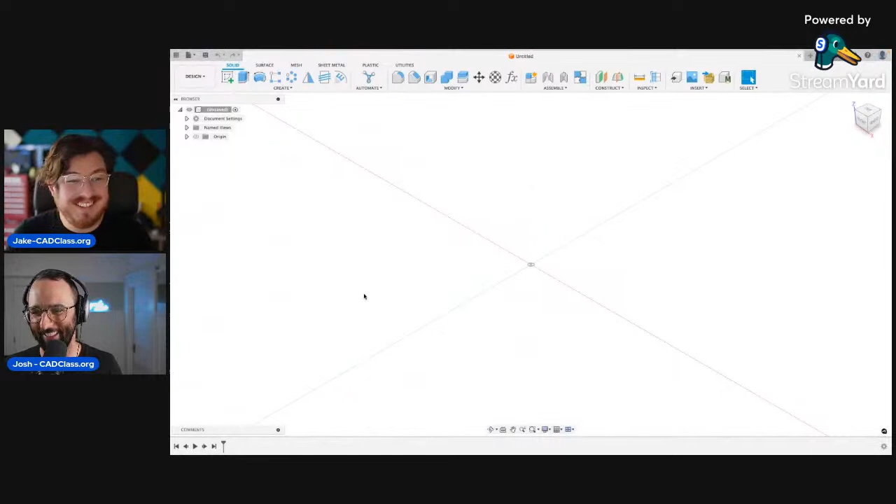Let me go ahead and present my whole screen. So I'm not going to see Josh's beautiful face. Yeah, but they still see it, so you're not going to see it. Too bad for you. Let me open up not the Lego brick, but the plastic building brick, for legal purposes. I love saying that.

That's going to be in our mechanical design section. So let's open up our Lego brick and see what David's referring to. The little rectangles did not stick to the side walls.

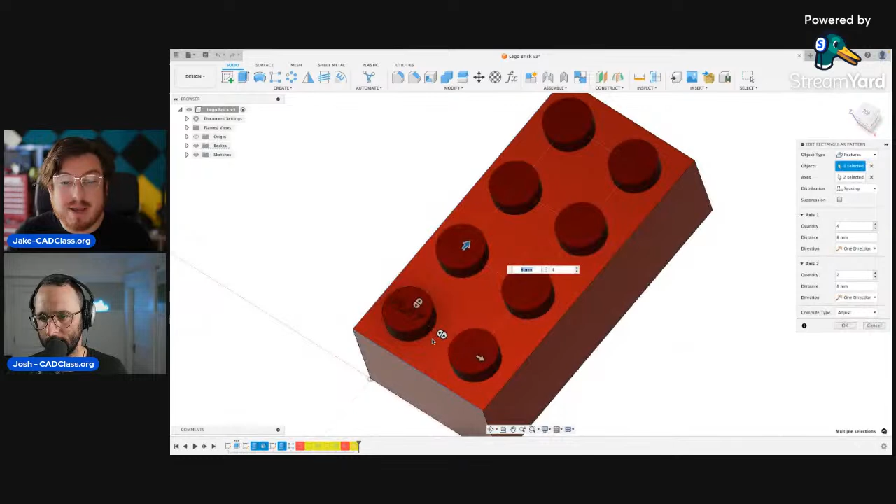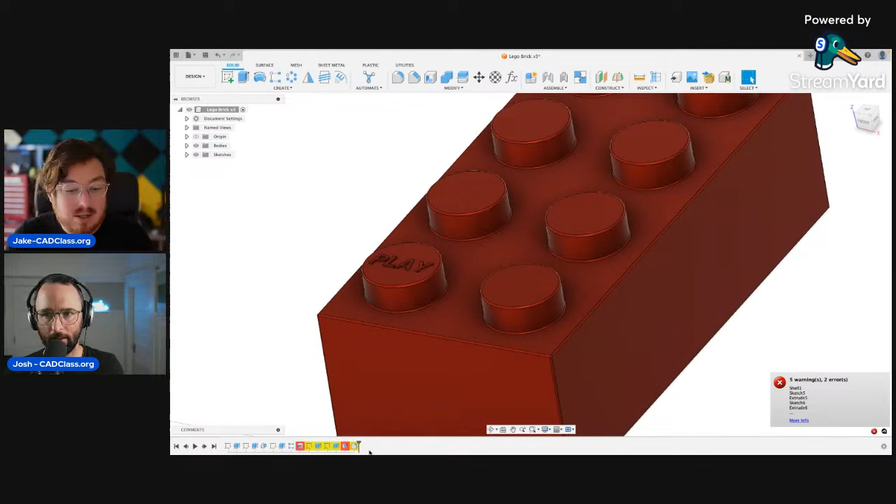Okay, I think I know what you're talking about. So if you guys can see right here in my timeline, I've got a ton of errors, and that's because on this project I selected to pattern both the tapered cylinder and the text. I'm just going to unselect that extrusion, and redo it. I'd like to pattern the cylinder and the taper, but not the text - I don't care too much about that. Let me go through why it's giving me all these errors.

It looks like it's slowing down a little bit - yeah, Fusion really doesn't like the shell operation very often. It's a massive pain. We've had to tell people many times now, especially in the Discord, that for some reason the letters really mess with this shell function, as do other things. They're on the underside - yeah, I see that, David. We'll go to the underside here in a sec, so it's definitely something you do later down the line.

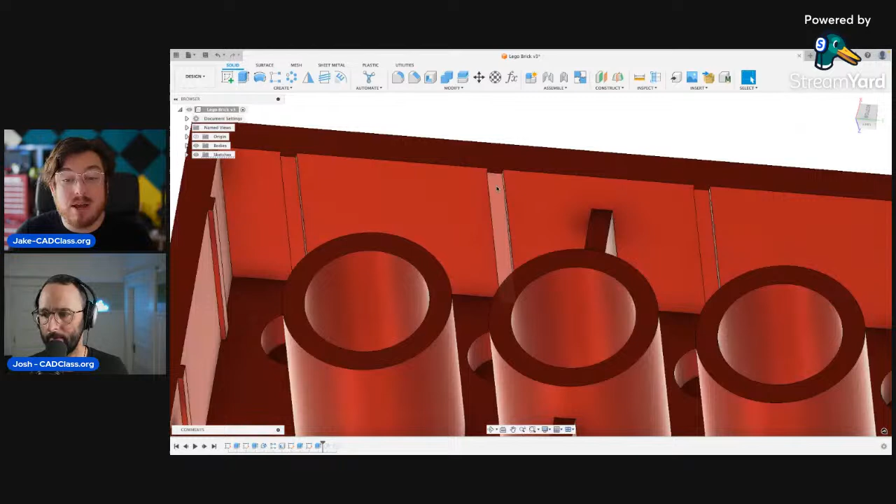And there you go, things are corrected a little bit more. So on this page, is he saying just the extruded rectangles right here? Yeah, let's see - 'the little rectangles did not stick to the sidewalls.' Let me put his comment up here. So by the little rectangles on the sidewalls, I presume you mean those - right there, yeah. Okay, so they're moving back and forth a little bit. There's a couple different ways you can correct this.

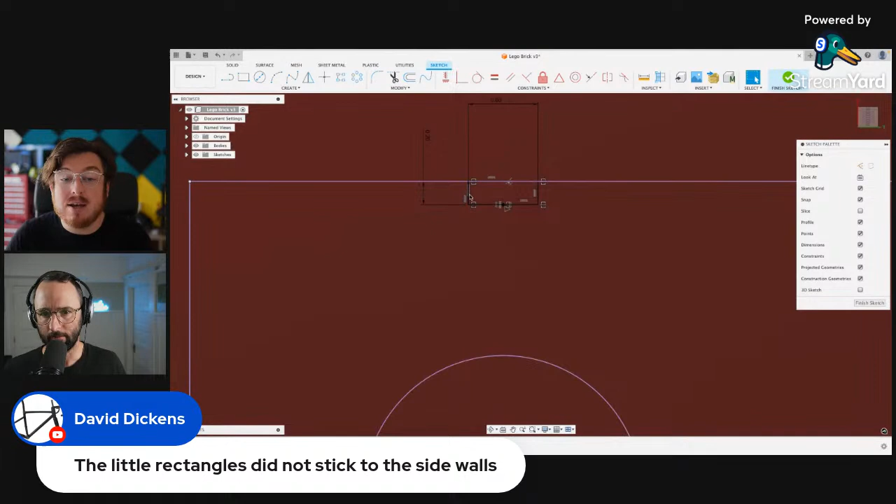One way would be to use the collinear tool and select the two edges that should be meeting. If you guys can see this, it makes all of the lines black and fully defined - that's what we're looking for. All of these should be completely defined and locked down in place. If they're not, you need to do a little work on this. It looks like this one is movable again, so I can just add on some collinear constraints.

The other way to do it is as you pull up R for the rectangle tool, instead of clicking in empty space to make a rectangle, you can click on the projected edge first - you can see I have this little X there, which lets you know it's going to be applied with a coincident relationship. So when I drag, it's not even going to move away. I can still adjust the dimensions and where it is on the page, but this top edge will always be attached to it. So I'd probably either add that collinear constraint or maybe redo the rectangles a little bit.

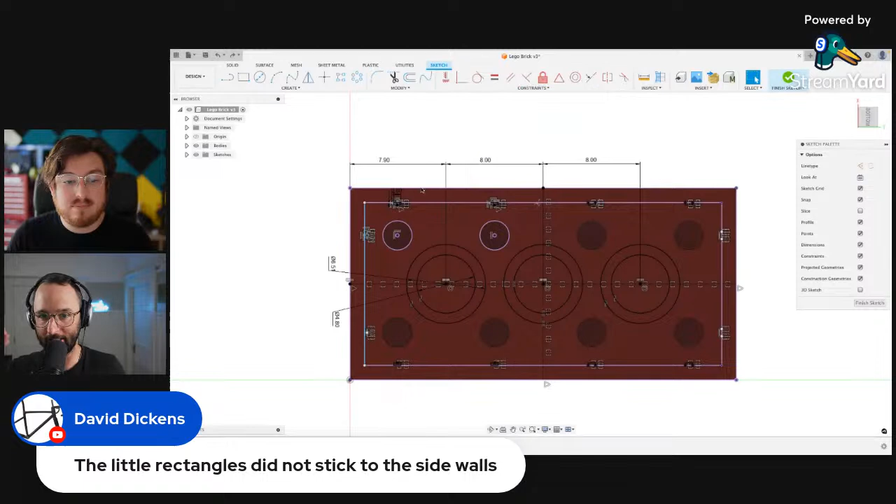He asks, can you show us what tool that was? David, that was the collinear tool - the collinear constraint. In the constraints toolbar at the top, you can click the dropdown and hover down to collinear. When you click the collinear tool, you select two lines, and that puts those lines on the same line.

So I'll do it again. As the name implies, collinear just means two lines that share the exact same axis. So if you had one line here and one line right above it, they would not be collinear because if you extend them, they don't run into each other. So even though they're parallel, they may not be collinear.

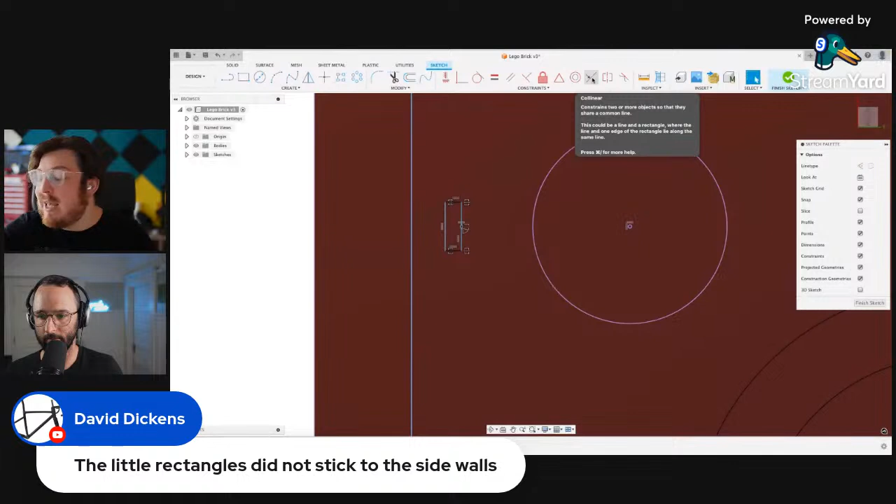It's in the exact same area as coplanar. If I put a cup onto a coaster, the top of there and the bottom of there are coplanar. So very similar things, they exist on the same area.

David says, perfect, thanks. But we have another comment from Tim that says he didn't select join.

Didn't select join, so that is automatically selected. Join is the top feature. So if I just go to join, extrusion, are you talking join or joint? Join. Yeah, okay. Oh, right here.

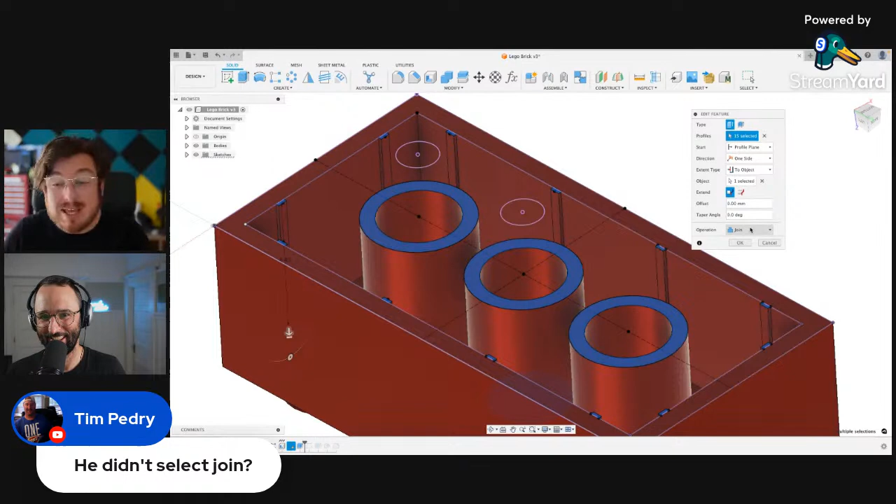So when you extrude things, it needs to have an operation. So it's going to say immediately join. If it sees that your extrusion is actually passing through something else, then it's going to be automatically set to cut. I'll do a really quick example.

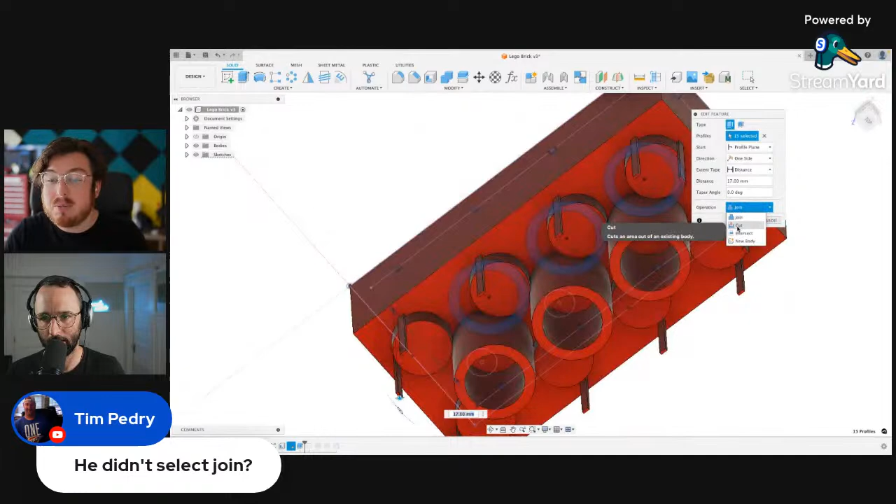Instead of selecting this bottom surface, I'm actually just going to be using the arrow tool for this, and I'll push this through the underside. You'll see it's automatically set to join, so I can change this to cut, and now it's red. It's actually going to be cutting out that shape through the body, which looks kind of wild.

We got an awesome Ethan, very smart. All right, so welcome back, by the way.

Wait, on the last episode, didn't you say we should never put two lines on top of each other? Jake, what do you think? This came up on the Pooch show.

So this is not two lines that exist on the same area. This is an edge of a rectangle that is collinear with another edge, which is completely okay because I'm not going to be moving them side to side. I'm going to be moving the rectangle.

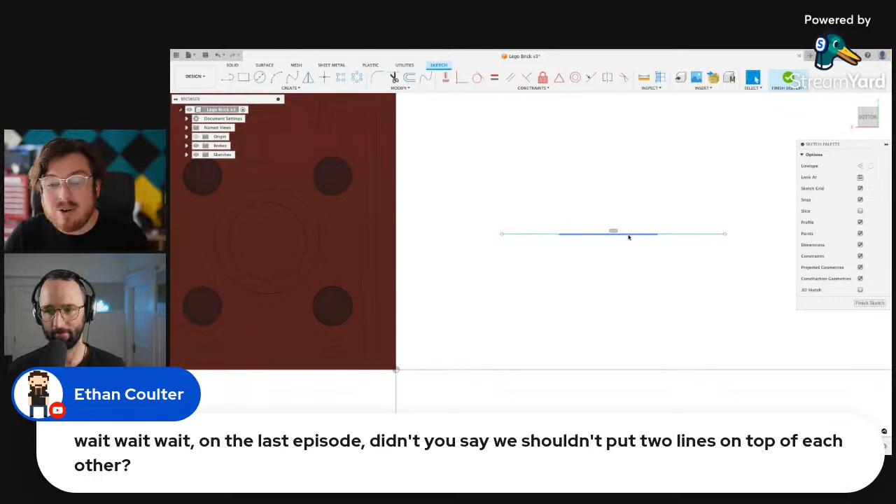So what was it, Ethan? What Ethan was talking about, what Mr. Alan Pooch was talking about last week, is that he had one line and then he also had another line. As you can see, it's really hard to click on just one line. I'm moving my mouse minutely, and it can't decide one line or the other. This is where we actually don't want to be messing around.

In our scenario, we have a larger rectangle and another rectangle right here, where I can define the length and the width of this, and then I can decide exactly where it is side to side. But the very top edge of this rectangle and the top edge of this rectangle already share the exact same collinearity, so I don't need to worry about that whatsoever.

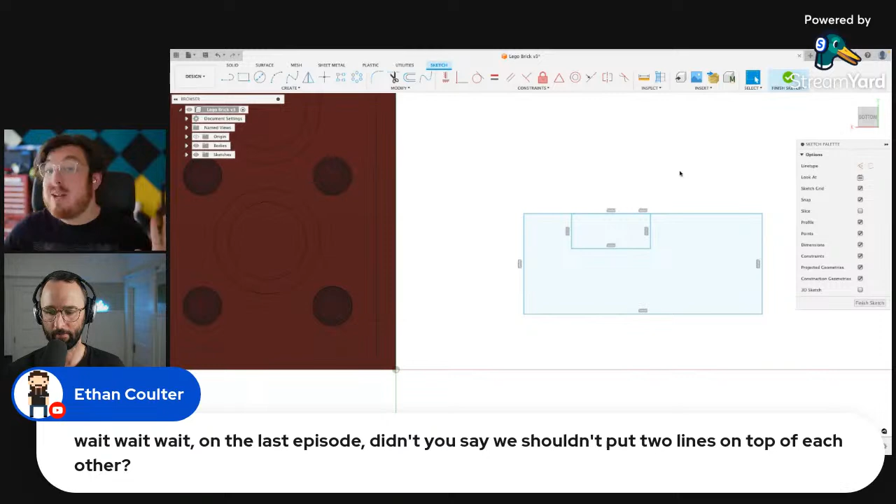So I think Tim's question isn't fully answered. He says join during extrusion. I'm guessing Tim means join during extrusion.

So when you're sketching in 2 dimensions, you are constraining sketches. We're not actually dealing with the join tool at all. Join actually refers to what happens when 3D bodies either intersect or cut, so it has only to do with the 3D portion of this.

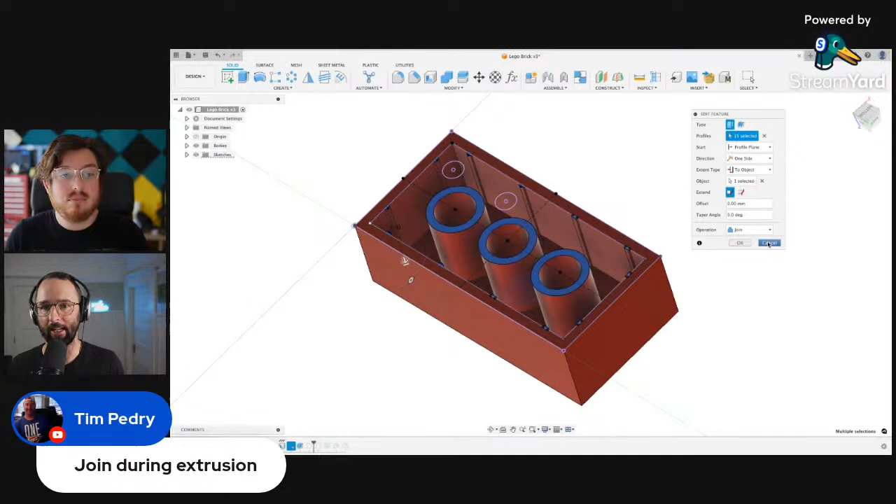So the question Tim had was, in the 2D sketch, when I can move my rectangles around, they're not actually connected to the edge of the Lego brick. So how do I stop that from happening? Because you're in the 2-dimensional workspace, you're talking about constraints, not the 3-dimensional.

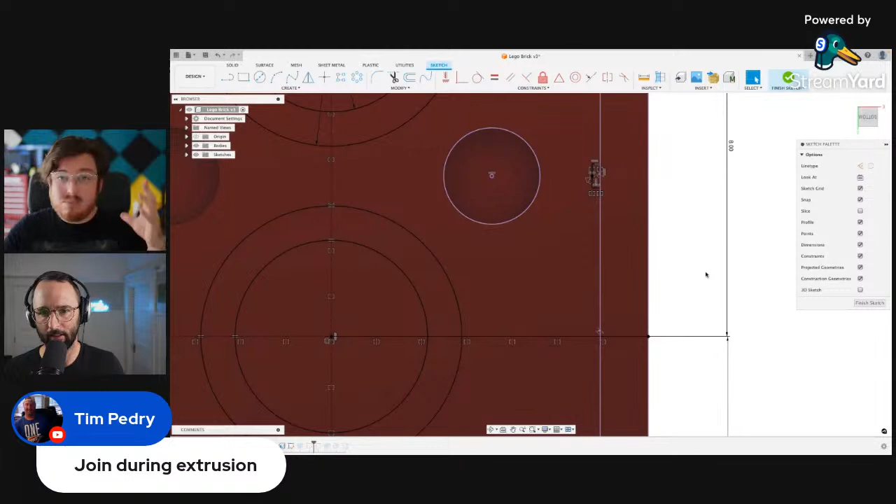You can definitely think of constraints as joints, but it's a little bit more advanced than that. Usually, when you talk about joints, you're talking about things physically touching each other. But a more advanced idea in joints is that you can have an offset joint where you have 2 things that are offset, so when you move one, the other is pulled with it because there is an imaginary joint between the two things. In the same way, you can have a defined distance, a dimension, between 2 objects in the sketch universe. Yep, so kind of similar.

I'm liking where your brain is going, but try not to think too deeply about it because it just gets too confusing at this early stage.

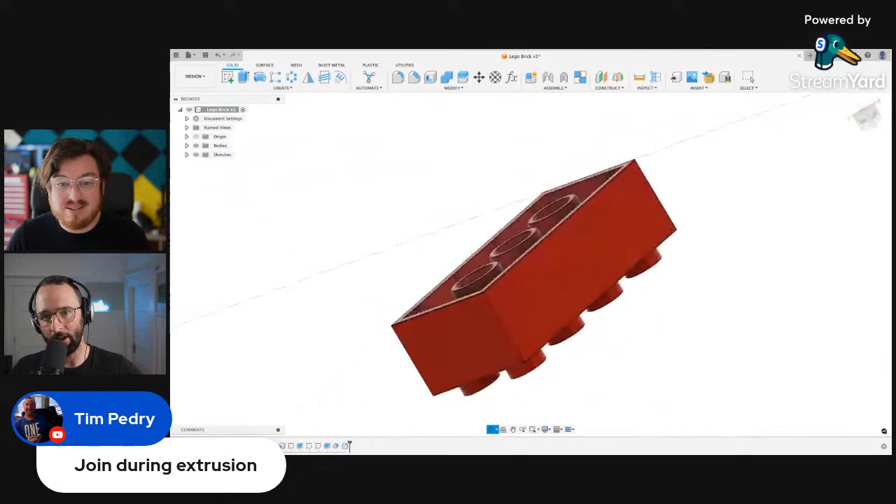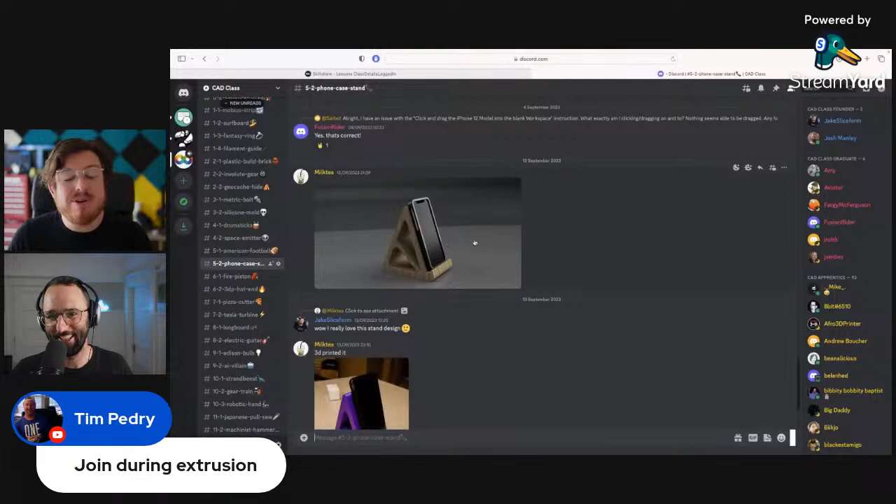And Jake, we've got some projects to show. Yes we do. Somebody made the phone case and the phone stand from chapter 5, and this is already really rad. The idea with the phone stand and phone case project is that, as Josh and I are educators, very often the purpose of the project isn't to make a phone case or phone stand, because how often is that going to be useful? It's the little things inside it that are kind of more interesting.

So in this project, we talk about either importing a Fusion 360 file into Fusion, so if you go onto a place like GrabCAD and someone has a Fusion 360 file, we show you how to import it.

That's rad. We also encourage you guys to grab your smartphone and measure it with a pair of calipers and recreate it, so you get a bit of reverse engineering, which is gigantic in the world of CAD. Then we make a case to introduce the idea of interference and how to adjust and edit that so you don't have two bodies clipping through each other.

And then finally we make a little phone case stand just to introduce texture map controls, because this is the appearance chapter. So if you have a wooden project, you can actually really accurately adjust the grain pattern of the wood to make it as accurate as possible.

A lot of our previous students who have a ton of woodworking experience will take what they learned from this course and make a woodworking project, make it in CAD, and sell it before they even make it. As soon as someone says, hey, that table looks rad, I want to buy it off you, then they can make it. So they don't need to buy all the lumber, make it, photograph it, store it, and then hope that maybe one day it'll sell.

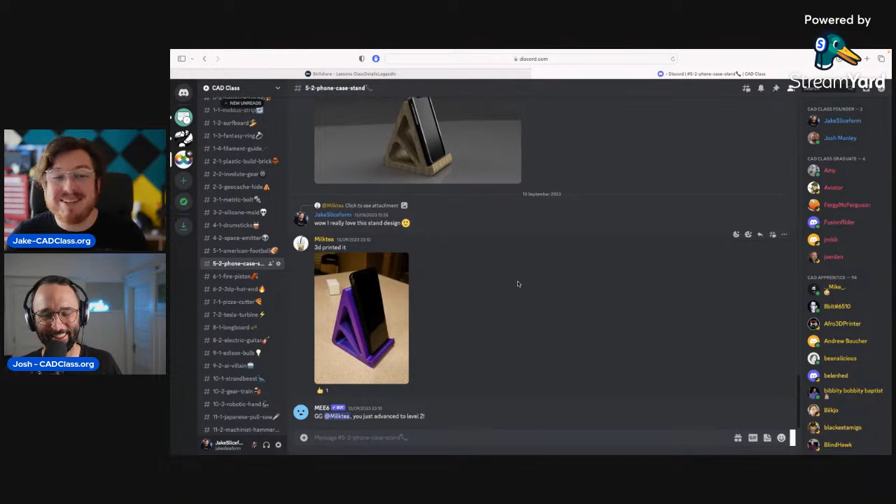Really rad. And then the other one was the fire piston as well, again from Milk Tea. Really dig it.

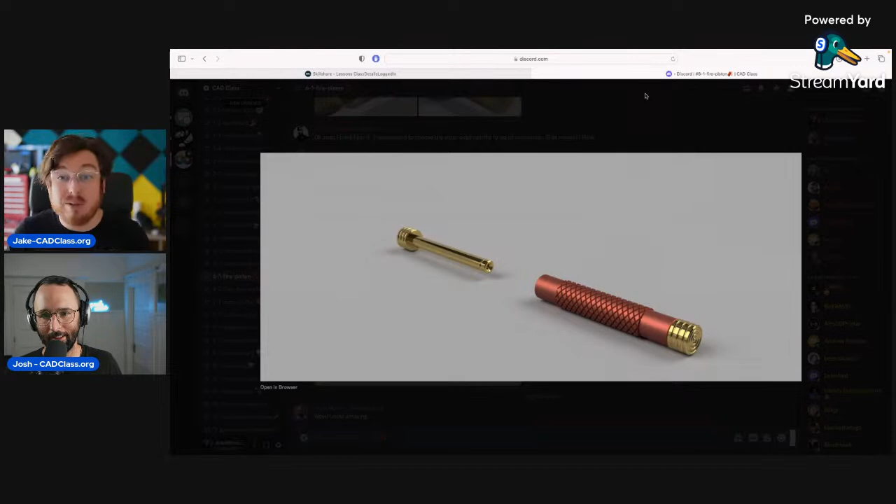You guys that are seeing this and thinking, wow, that looks really different to my workspace - this is the rendering workspace, which we cover in chapter 9 of the book, or week 9 in our course. This is where you can pull in your 3D prints, or all of your models, into a different workspace, add the design into the rendering workspace, add some lighting and shadows, mess around with the camera a bit, and make something that looks more photorealistic. If you put some time and effort into this, you can fool people into thinking this is a real product.

But this looks really fantastic, I love the way that turned out. And then there was a Mr. Mitnick had one, which I'm not sure if I saw that. Let's see - we have a bunch of people that have stuff in the challenges as well.

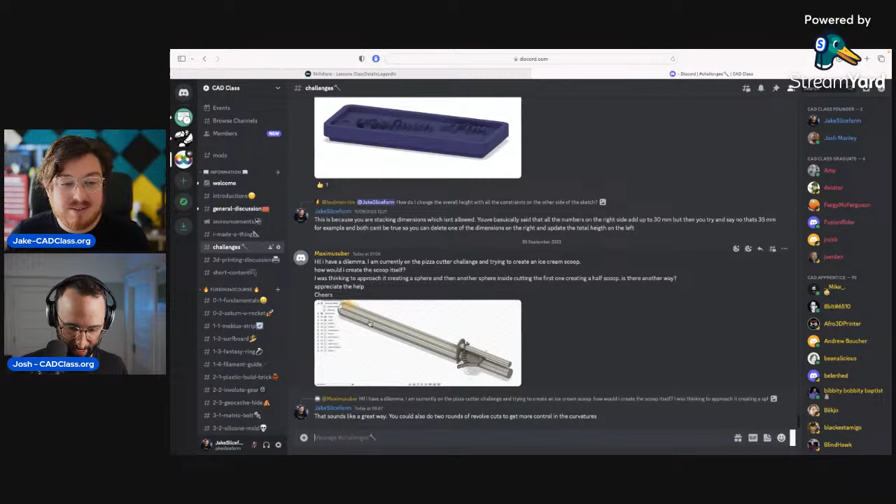Oh yeah, that's right. I believe that was it. Somebody's working on an ice cream scoop, which I'm so excited about. Awesome, that's gonna be rad.

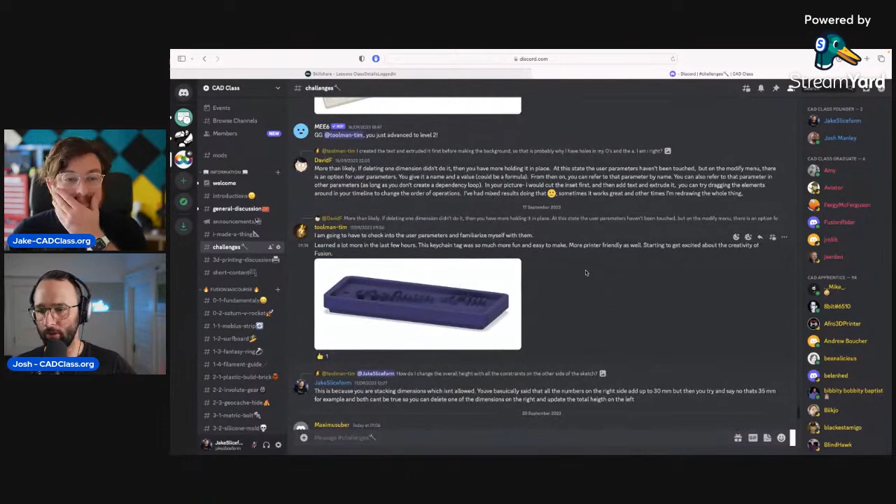This is how you get better at CAD, right? All of you in here doing these challenge exercises, forcing your brain into the mode of 'I need to be able to make this thing,' going from us holding your hand to you actually designing this in the real world - this is actually how you learn. So I love seeing this stuff.

That's what IKEA does with their kitchens. That is what IKEA does with most of their online catalog.

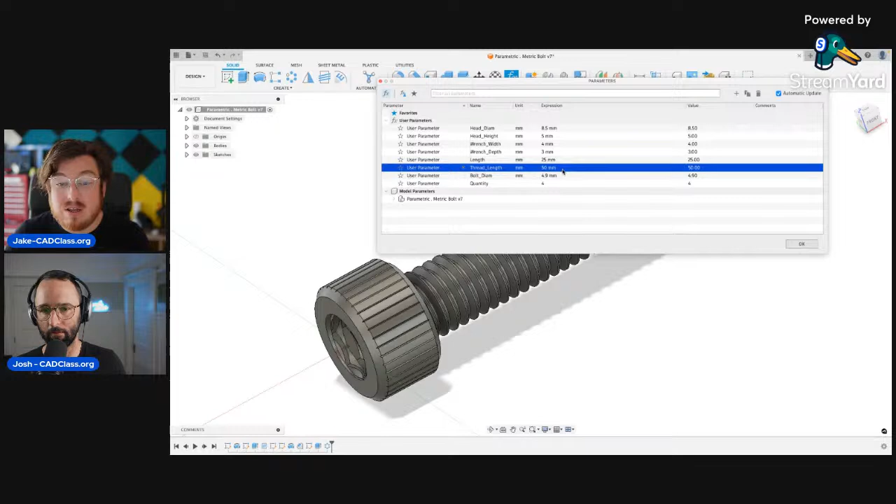Then I can click OK - oh whoops, that should auto update. What's going on? Oh, the length - there we go. I want to change this to an M5 by 50, then it automatically updates very, very easily. And then you can say, well, I actually only want the threads to be on 25 millimeters - there we go, then it auto updates. So that's the value I was changing around.

So you can really quickly edit parts of any model incredibly quickly, you can customize them very easily. Let's go ahead and change this one back to 25. Very, very cool project, I use parametric design all the time - if I'm working on a 3D printed part and I want to maybe adjust the size but keep the wall thickness exactly the same, I can mess around with it in a bunch of different ways.

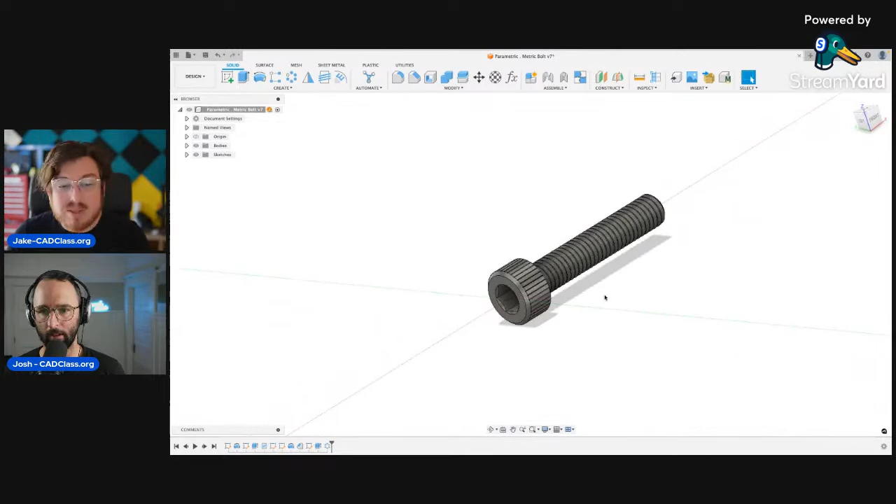But one of the things somebody was having trouble with is the triangular profiles that give us these really nice cutouts here on the bolt entrance and on the very end of the bolt right here. So they were having a little bit of trouble finding where the triangles are that are being revolve cut, and so this is where we can kind of sort it out.

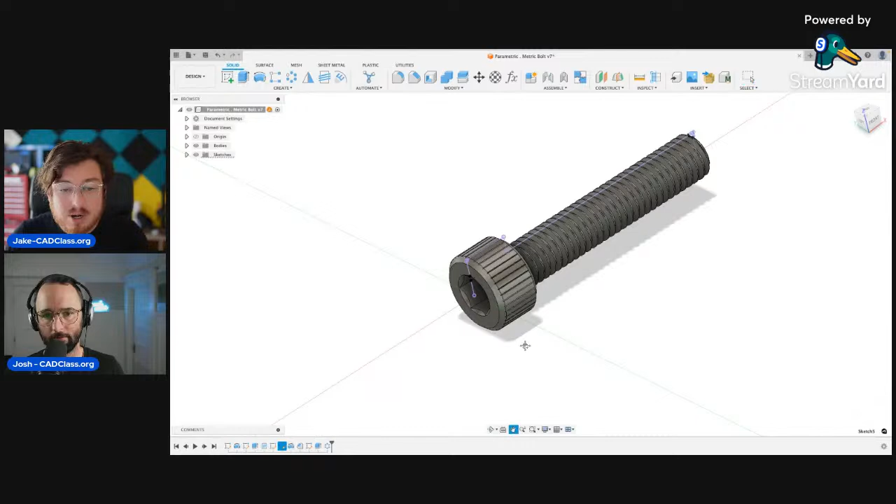One of the ways I like to figure out exactly where my sketch is in the timeline - you can absolutely go through and name all of them, or you can click through the sketches here and actually find out exactly which one it is. So there's a bunch of different ways to find out what you're looking for. But on here we have our revolve cut, as you can see that's cutting out the very end of our bolt and the entrance of our bolt. So where is this sketch? Let's slice it.

Where is this sketch? There we go. So just going to slice that and cover it. So we have got this triangular profile right here, and we have got this triangular profile right there.

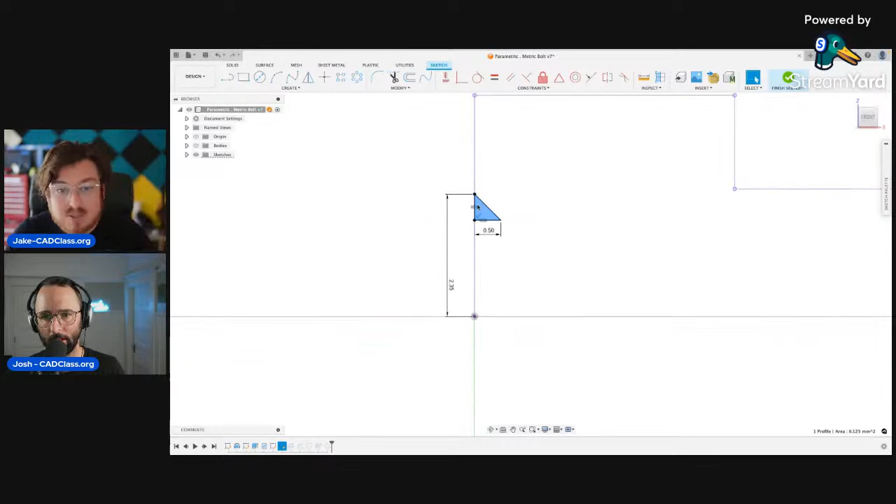Let me turn off the body really quick, because this is how we have it in the book, where we just have our dimensions. So if you look in our book, we actually have our origin right here, letting you know this is on the left-hand side. We've got a triangle facing upwards, because this is going to be cutting the entrance of where the Allen key would be going into. And for this scenario, we've got an equal-sided triangle.

So we actually only need to define one edge length of this triangle. And then we're saying that the left-hand side is coincident with our origin. And then we just need to say exactly how high is it up and down. Again, any one of these dimensions can be parametrically driven, so you can edit them as much as you would like. But this is going to be on the left-hand side.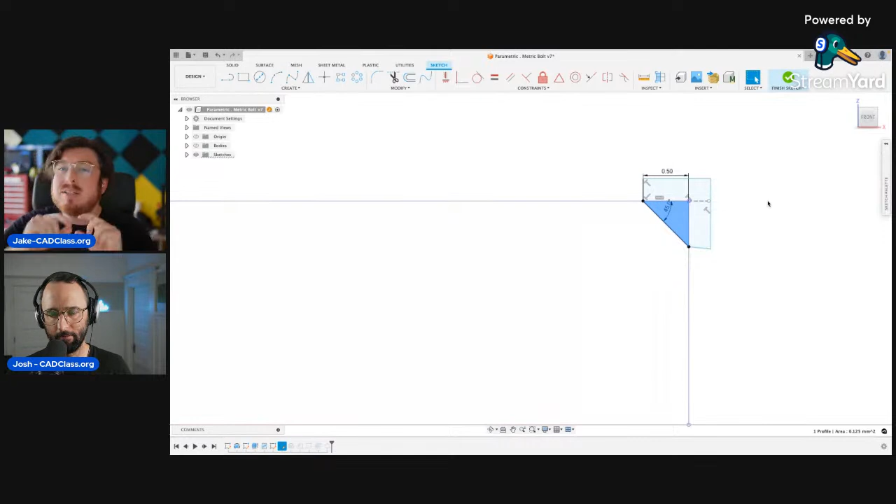This is this kind of funky, undefined section of the sketch, because if you just revolve this triangle alone, very often it doesn't cut all of the bolt. It leaves you with a little sliver of material, so you can actually extend the profile that's being cut. So if I go over to our revolution, you can see we've selected not only that triangular profile, but also this outer material, so then we can guarantee that we're cutting all of the material.

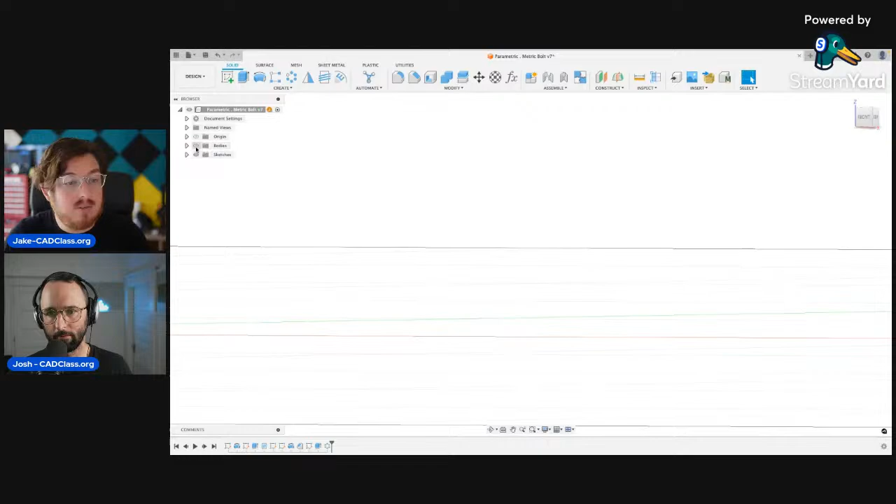And then after that, if I turn our body back on, you can see that we don't have any weird sliver of material hanging out over there. And we have this really nice, neat triangular cutout on our hexagonal opening.

Yeah, and I think that probably helps. We'll find out. We might also consider, each time we get these comments, we try to figure out how to go back into the book and make these changes. We might have to change out some of the entire book about every month. So we might have to just show like an overall view of this bolt, and then where exactly those triangles are. I'm not sure. We'll see. We'll dive back into the book and have a look. But I love this idea, though.

I think the other thing that kind of confuses people, just to interrupt you really quick, is we have two different things that we're revolving in the same sketch. So we've got, obviously, these two, you can select them both. That's fine. But then we also have this other profile over here, which for a beginner kind of seems like totally dissecting a sketch. Normally you would say, all right, I'm going to sketch this, then revolve cut it. Then I'm going to sketch this and then revolve cut it.

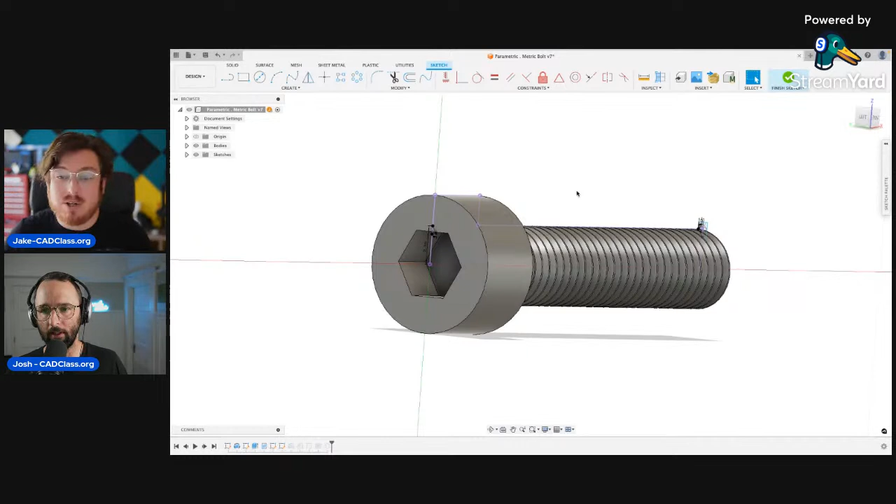But the nice thing about this is that they both share the exact same axis of revolution, which means they can both be cut in the same revolute cut feature. And because they can both exist on the same plane, they can actually be merged in it. So instead of having one sketch, one revolve cut, another sketch, and another revolve cut, we can actually half the amount of features and compress it so it's all in one thing.

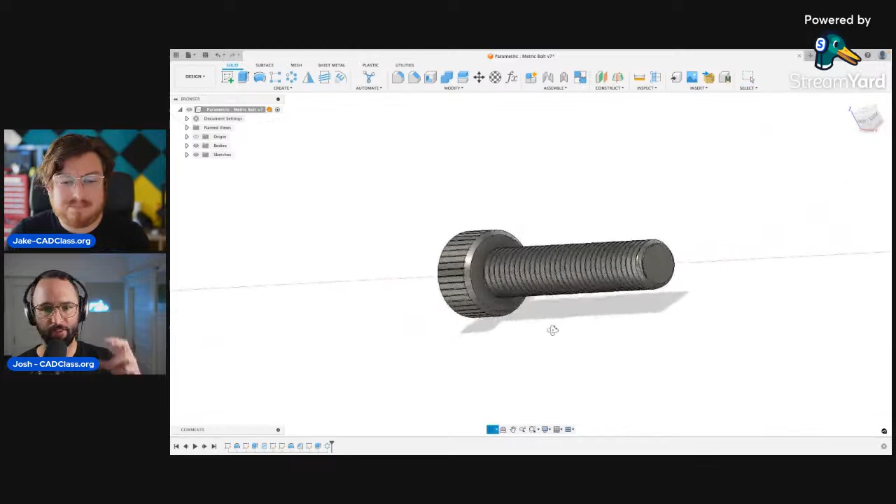So let's dive actually a little bit deeper on that topic. When you're thinking about keeping things clean, like when you're thinking about designing a project that's sort of scaling and getting bigger and bigger over time, the amount of features that you have matters. The amount of operations that you make matters. Can you talk a little bit about philosophically how you think about keeping things clean and doing it in fewer features, and why that even matters, what difference that makes?

So it's more of an organization thing for me, where if you have a timeline down here that's not very long, that's great. If you've got a timeline that isn't very efficient and it's super long and you have to scroll through it, it gets more confusing. Things get lost. You forget what changes need to be made. And it is just kind of bad form. It comes into the area of, I could be a better CAD person for me in the future, or I could be lazy for me right now.

So if you go through your sketches, you can right-click and rename them. Right at the beginning, I was hunting through all these sketches about where that profile was. If I wanted to be even more of a good engineer, I could rename this triangular revolute cut profile.

I want to double down on that. You're not naming things so you remember what they're called today, you're naming things so you remember what they're called next year, when you dive back into a project you haven't seen forever. It's the same with code. When you're coding something up, if you don't leave any comments and your code isn't very clean, you can't figure out what the heck you actually did. The same thing happens in CAD, where you need to know what the heck it was.

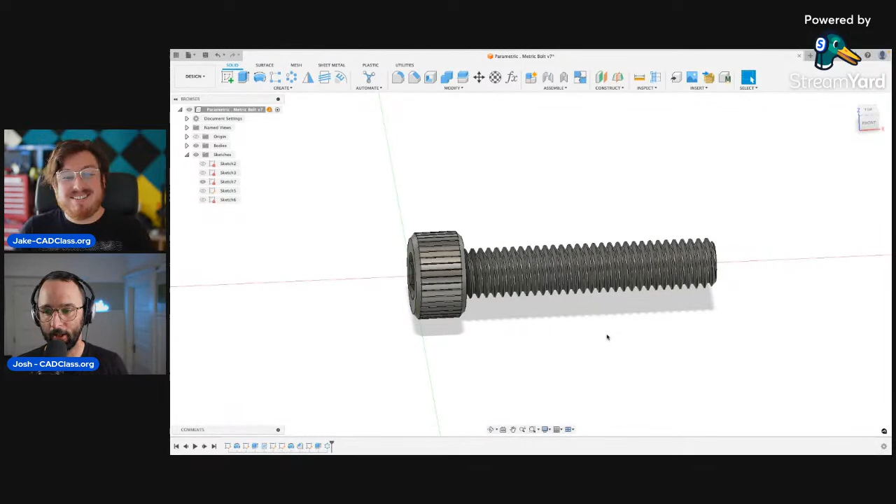You can kind of figure it out, but keeping things clean and tidy, reducing the number of features, and adding names to them allows you to go back into those designs much later. It also allows other people to go into those designs, understand your process and thinking, and make edits necessary.

In the world of CAD, a good example of organizing is when you're working in a team, maybe on a rocket or a robot with a small group of people, constantly changing and adding parts—it's kind of an alive project. But I'd say that's just as effective an example as working for yourself in the future, because another person is probably going to know just as much about this project as you will in a year or two, which is very little. So designing with that kind of fail-safe built in is absolutely critical.

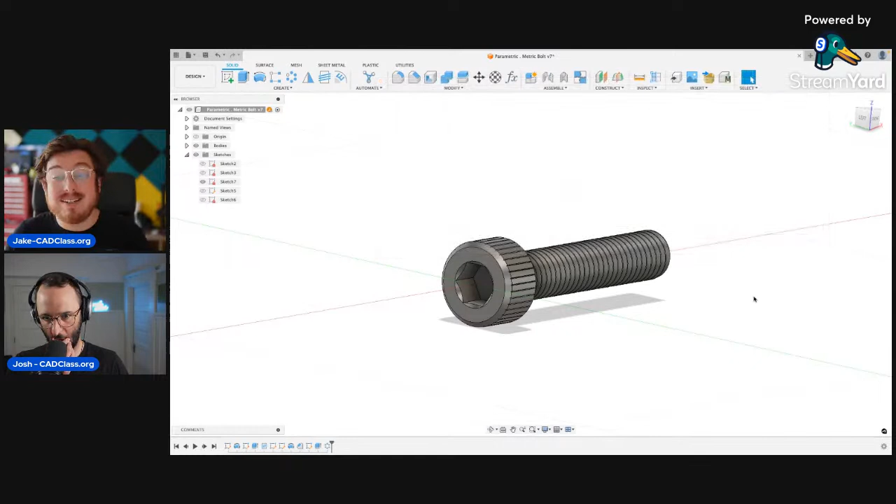Adding in names, adding in parameters so you know all the important dimensions are listed, having really good names, everything nice and neat and tidy, so you don't have a timeline you have to scroll through to find that one thing—that's absolutely critical.

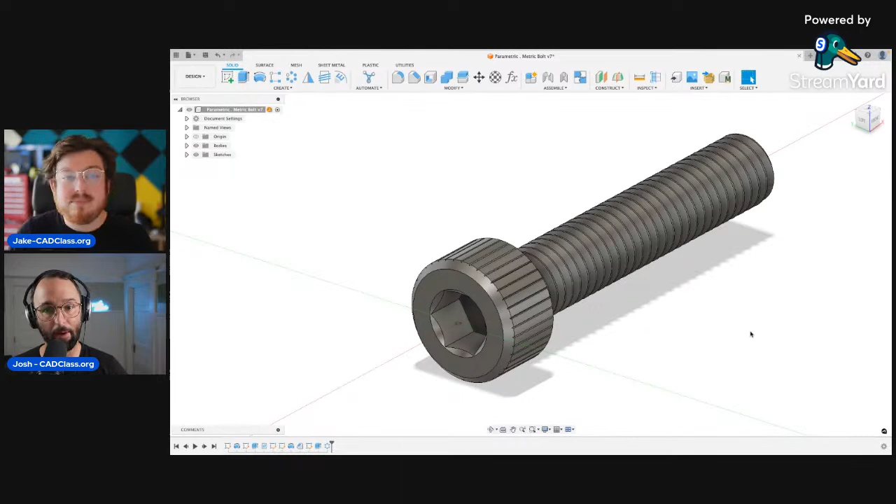For those of you who want to do this professionally, who are interested in turning this into a career, this stuff really matters. If you're talking to an interviewer and they ask for a CAD model you've built, and they see a timeline that's out of control and not very organized, they're going to get a sense of what kind of designer you might be, and they might judge you on that alone. It matters quite a bit for any students thinking about taking this into engineering fields, or even designing for clients.

It definitely matters. Absolutely.

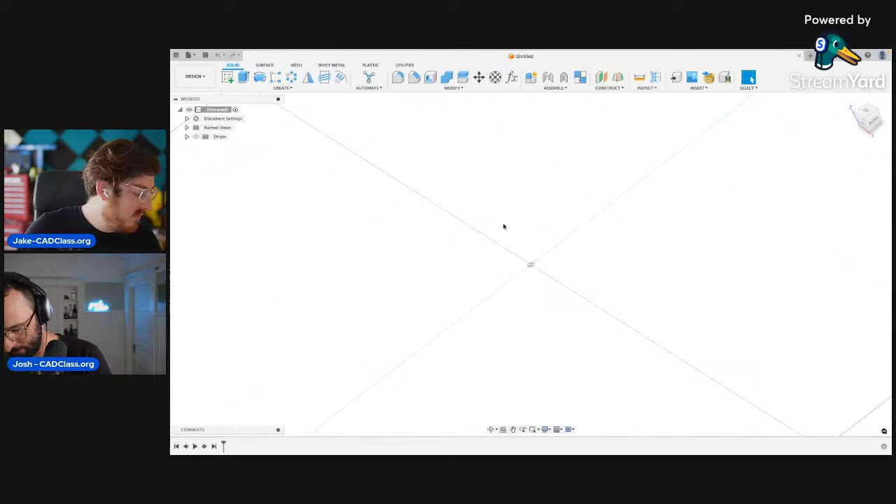All right, so our next one—this was page 66, is that correct? Oh yeah, for the filament guide. Third paragraph on page 66 was giving somebody some trouble. Let's see, 66, third paragraph, one, that filament guide—oh, that's the project tool.

Yeah, the project tool is hands down—we talk about it every week—the hardest tool to understand what it actually does. Just keep playing with it. But we'll talk briefly about this, try not to say the same thing every week.

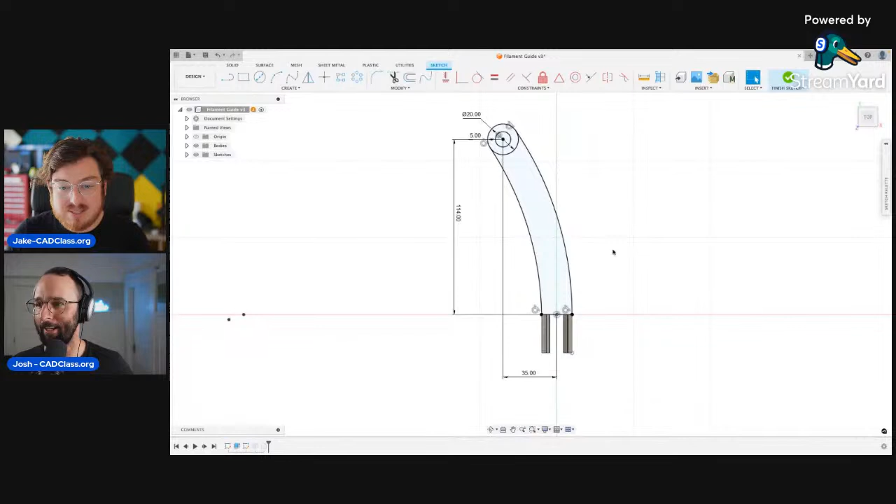Page 66, third paragraph says: press P for project and click the rightmost and leftmost vertical lines on the arms. Add a tangent constraint between the arc and this new line. Can you just do exactly what I'm saying? And let's see.

Okay, so I'm going to type P for project. You can see I've got my project tool right there. I'm going to click the rightmost and the leftmost vertical line and click OK. I have now projected this top edge, which is floating above my plane, onto my plane. So now I've got purple edges on the left and right.

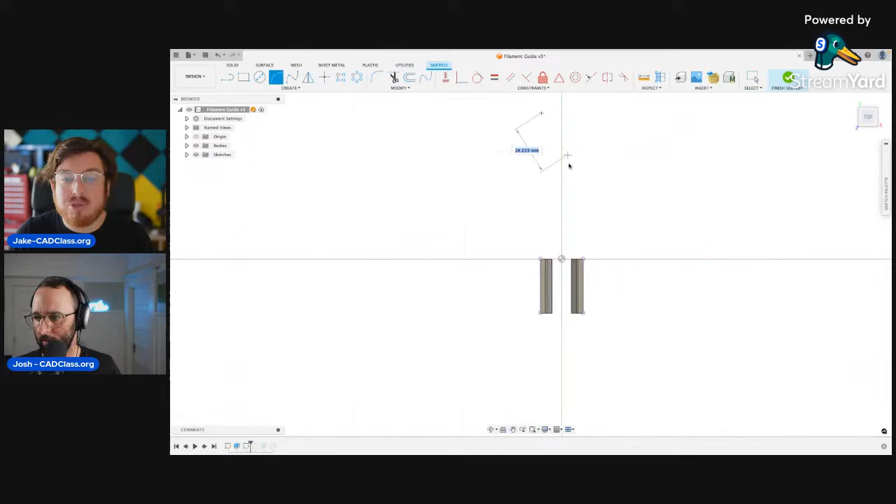Then if I add on a couple 3-point arcs that go to that line, I'll just do some random ones here and there. You can see this one automatically put on a tangent constraint just because I nailed it, because I'm a professional. But I can also go into the constraints, click on tangent, click on my arc, and then click on that projected line right there.

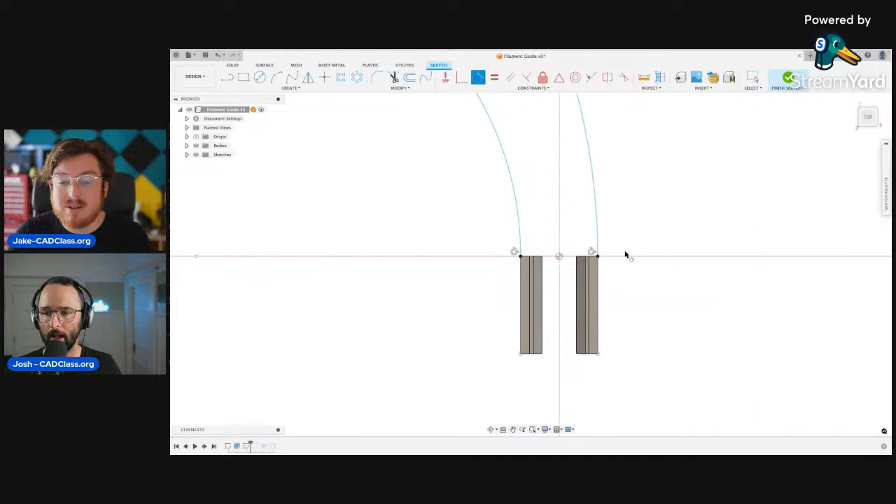I see. So I think what we'll do in the future for this project is show more of that projected surface. On page 66, you can barely actually see the lines you're supposed to project. So I actually think I do understand where that is tricky for people, okay.

This brings us to a topic I want to talk about as we're going through this, and that is we are thinking about getting rid of some projects and adding new projects for version 2 of our book, probably coming out middle of next year. So anybody in the chat who's got an idea for a project, a tool, or an area of Fusion that you'd really like to explore, please shout those out either in the Discord or live on this chat. We are actively working to build out a few new projects.

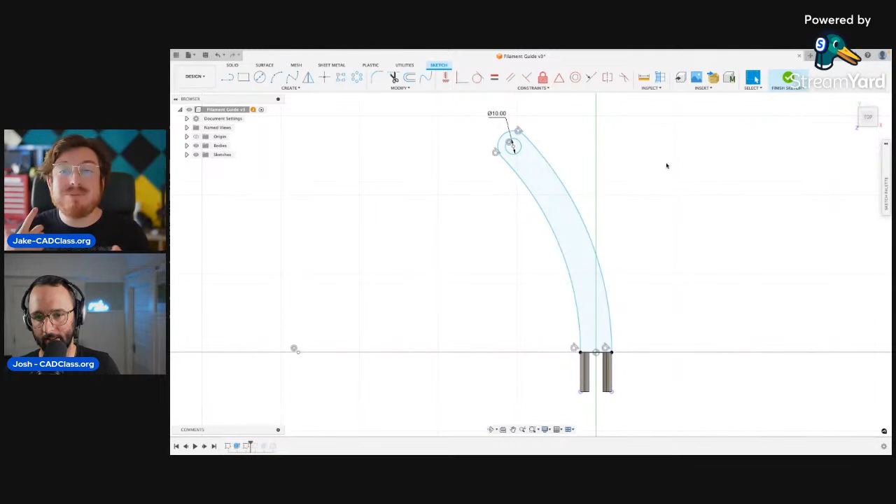We never want to have a project that is so cemented in place. We always want to be updating the projects, making them nice and new and fresh so you guys learn as much as possible. This is going to be in the first chapter of our book, the first week of our course, where we talk about single parts, where it's just one thing you're dealing with, no multiple assemblies, as simplistic as possible.

So just for reference, we build a Mobius strip, we build a surfboard, we build a Lord of the Rings ring, and we have our filament guide, which is a very handy tool for our 3D printing nerds out there, myself included.

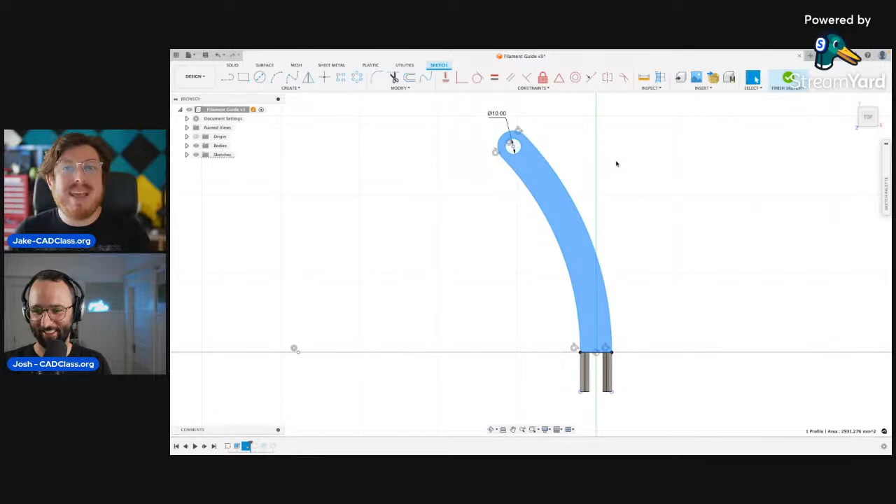But this is a project that a lot of people we've heard is just that little hair too difficult. We obviously want to challenge people, but we don't want it to be a pain in the ass of a challenge. So if any of you guys have any single part ideas that are cool and exciting and interesting, absolutely post them in the chat. It's a bit of a philosophy for Josh and I that every single project we do needs to be interesting and exciting. If it's boring, absolutely not.

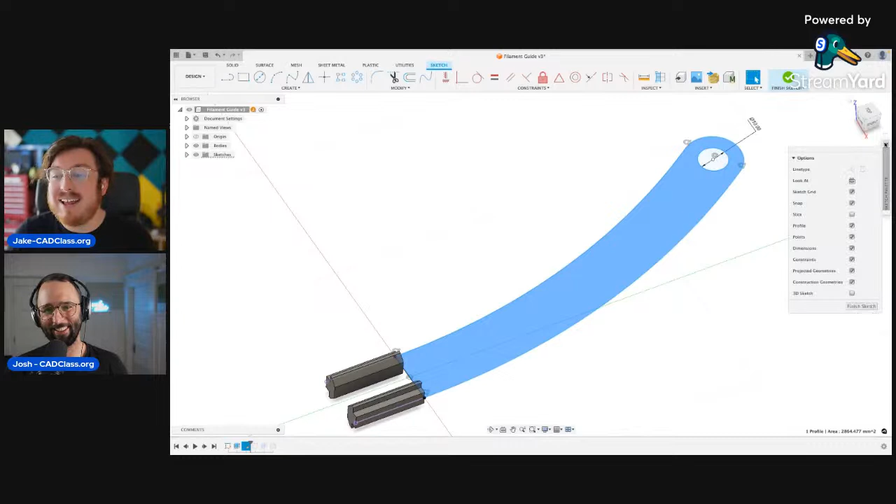Nix it. Yeah, so the boring project, I think it's twofold. One, it's boring, it's not as interesting for most people, but also this one might be a little bit too challenging, a little bit tricky right from week one, for early on. Which is absolutely an acceptable stance. If you say this is too hard, that is absolutely okay. That's absolutely a reason for us to reconsider changing it around.

So again, if you guys have any ideas, definitely send them our way and we'll definitely consider them. We've got a couple rattling around. Okay, so hopefully that answers some questions on the filament guide. Again, I think I understand where the pictures are not doing it justice.

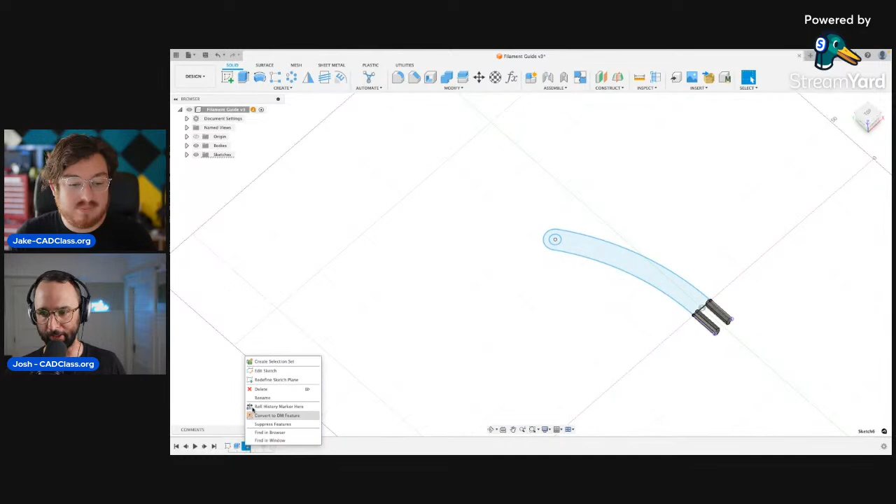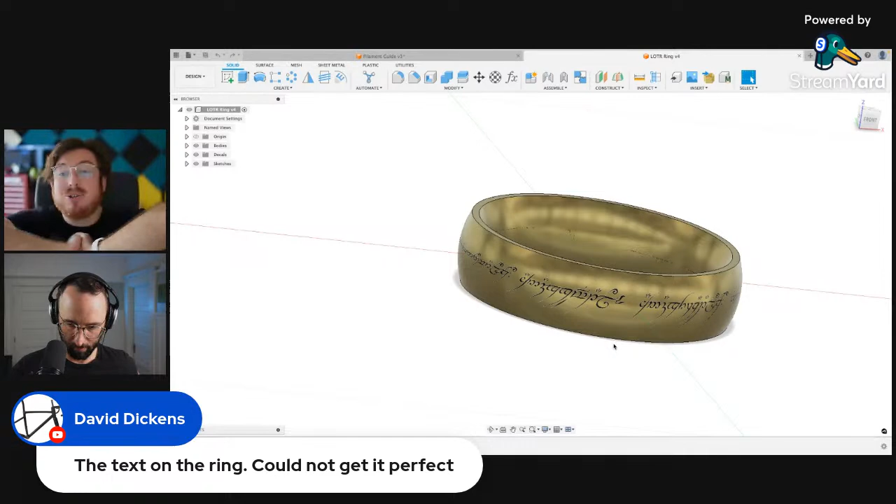David Dickens says the text on the ring, this has been a common problem as well. The text on the ring getting squished, I think was part of the... we'll see here, so the text on the ring could not get it perfect. Yeah, this is the decal section of Fusion, it's really rad but it isn't perfect. Everything about Fusion is purely representative. So if you add a decal onto a curved surface, it's going to be projecting essentially a flat picture onto a curved surface. So the very front, where you put it on there, is going to look really, really accurate.

As you can see, if I just... there we go, perfectly. It's then getting stretched as it goes around a curved surface, so it gets just a little bit deformed as it goes around.

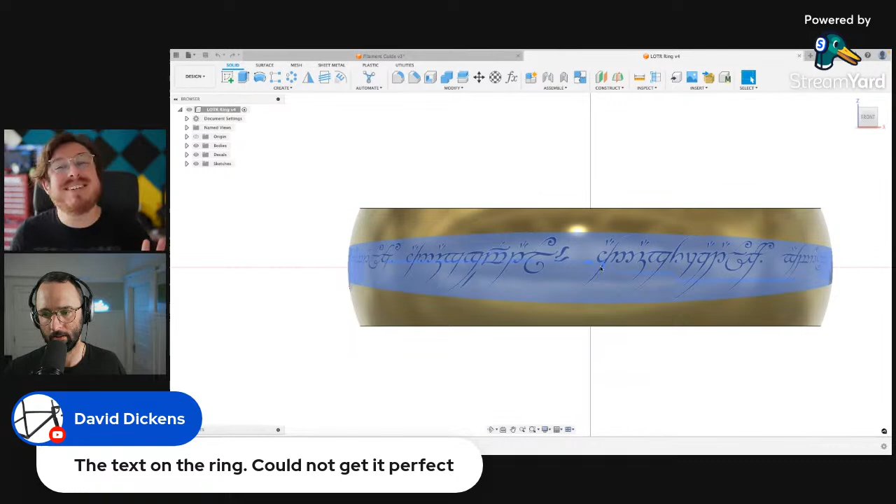This is not your computer, this is just how graphics work, so don't worry too much about it. There is no perfect nature in this. This is purely just an example to show you how to get an image, a JPEG or a PNG, onto your model. If you guys are ever doing any client work for anyone and you're doing a CAD project, the coolest thing for that client is to take their logo and put it onto a 3D model.

They go absolutely bananas for it. Yeah, they love that. So David also says, do you not run it all the way around the back? No, we didn't run it all the way around the back. But again, this is not a precise, has-to-be-done-a-specific-way project, so this is just what you find looks good for you. Play it around, this is purely representative, don't worry too much about it.

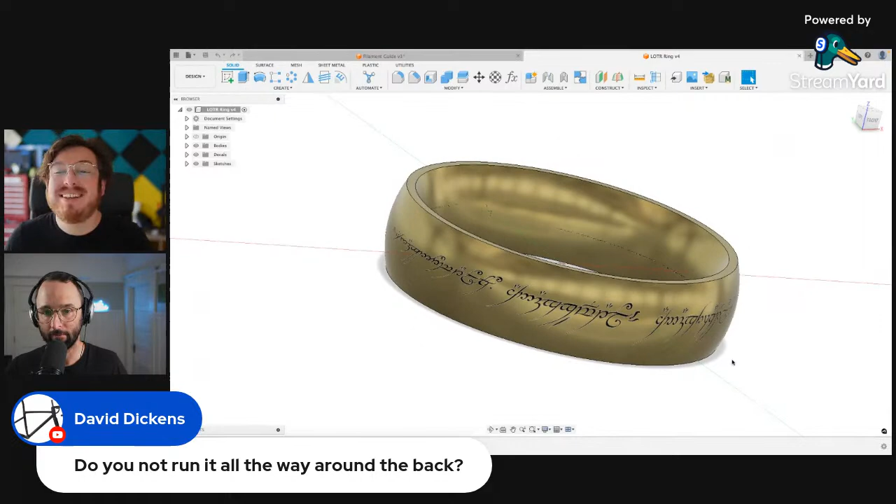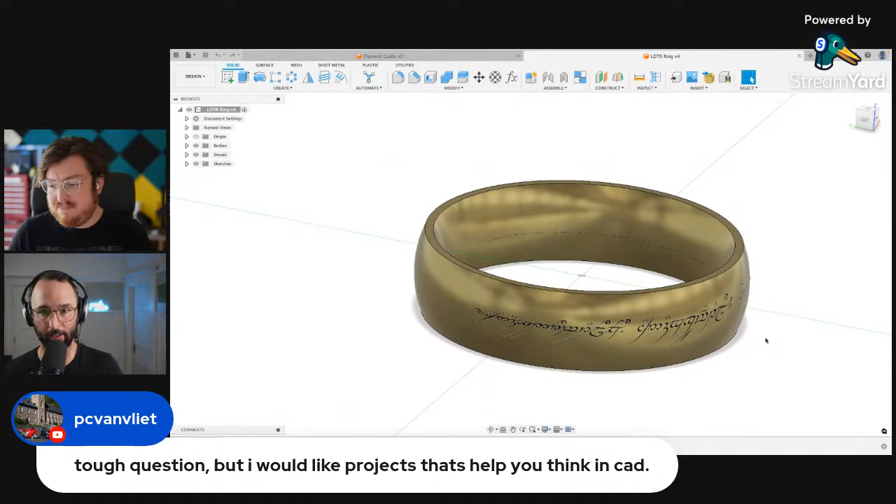PC Van Vliet says, we asked him, what would you want to see? And he says, tough question, but I like projects that help you think in CAD. Let's see, it's like a language where you need to take a certain approach. I find myself thinking of an object and not really having a clue of how to start with it. I think that's actually pretty common, and I like your language analogy.

We actually talk quite a bit about that. Learning CAD is actually learning the language of 3 dimensions. And Jake, I also like one of the things that you do is you look at all of the objects, say, on your desk. So PC Van Vliet, look at all of the objects right now that you have on your desk and start to try to think in your mind about what the object looks like, what shapes it's composed of, and how you would actually go about making that physical thing. So I've got like a lens cap.

I think the 3D Print General did a lens cap on his, and he redesigned that lens cap. And that's one of those things — it took him like 4 or 5 iterations, which is tricky. It's a very tricky thing.

That's one of those things where when you think of it originally, you're thinking, well, this is just a circle extruded and shelled out and things like that. But really, there's a lot of small features on this, a lot of shapes that are either cut from other shapes or added to other shapes.

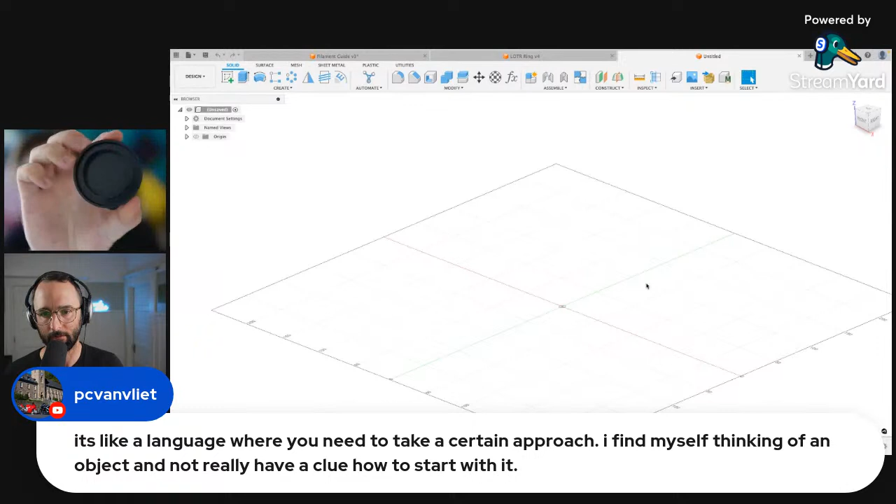So you guys can see what he's talking about, where it's essentially a flat circle, and then it's got some indents on there that need to be really, really accurate to actually mesh into a camera body. And if they're just barely not the right dimensions, then you don't get a nice tight fit. There's not enough friction buildup, it's kind of jiggly and wobbly, and it isn't effective. So yeah, it's a very, very tricky build.

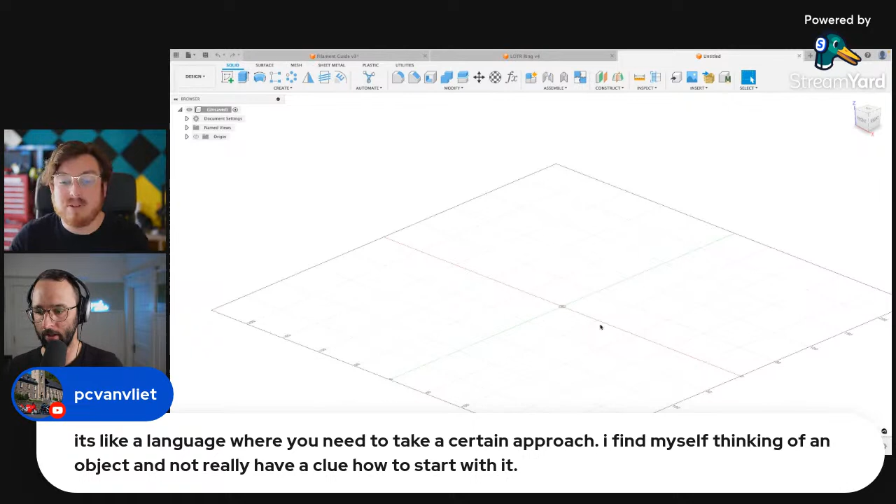So thinking in CAD, you're learning to think in shapes that are added and subtracted and cut from one another. Definitely. You really have to look at as many objects as you possibly can, and just picture in your head if it's an addition, a subtraction, or a join between two different shapes. That's really all. Even when you think of manufacturing, those are really the only 3 processes: additive, where you're building things up from nothing; subtractive, where you're cutting them out; or combinatory, where you're putting them together.

A really good example that I like for a lot of people is just a very simple cup or vase that you have, probably on your desk. I've got this little vase that holds some grass in there, but you can start to think about things in the geometric space, where you go, okay, this is kind of a cylinder. I think this would be a really good example where we break this down as simply as possible. So when I look at this, the first thing that comes to mind is, alright, it's round, it's got a round profile, and it's got some height.

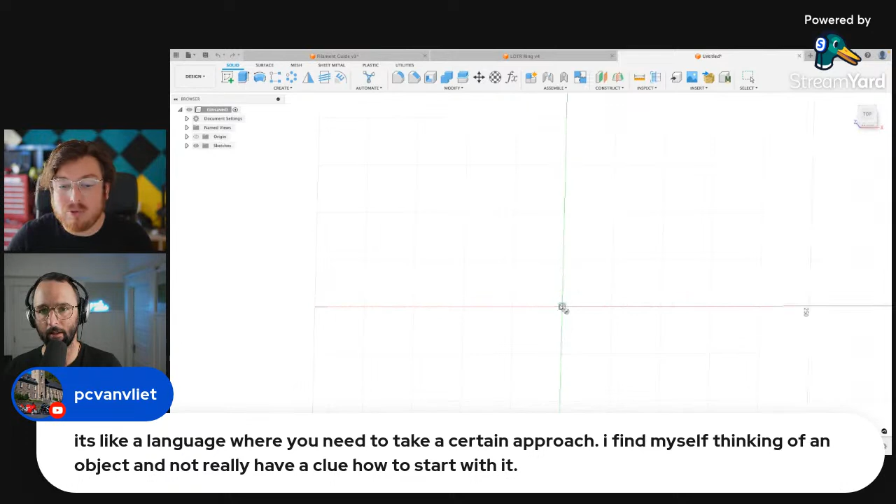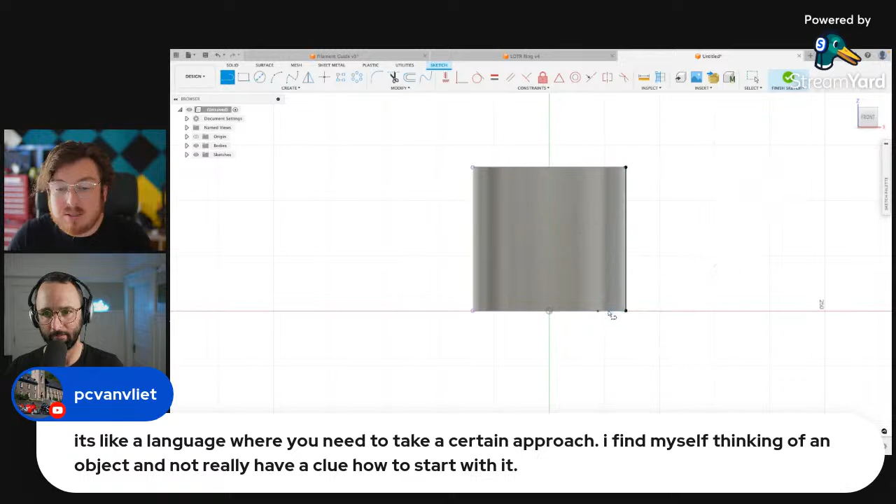So this is a cylinder, essentially, yeah? I think we can all agree that it's got some cylindricality to it. But then you'll say, it's got some kind of curvature to the outside of this. Let's mess with that a little bit. I'm going to draw a sketch of some kind of arc that cuts into it just a little bit, matching what this profile looks like. Then I'll make some lines so that's actually a clickable profile right there.

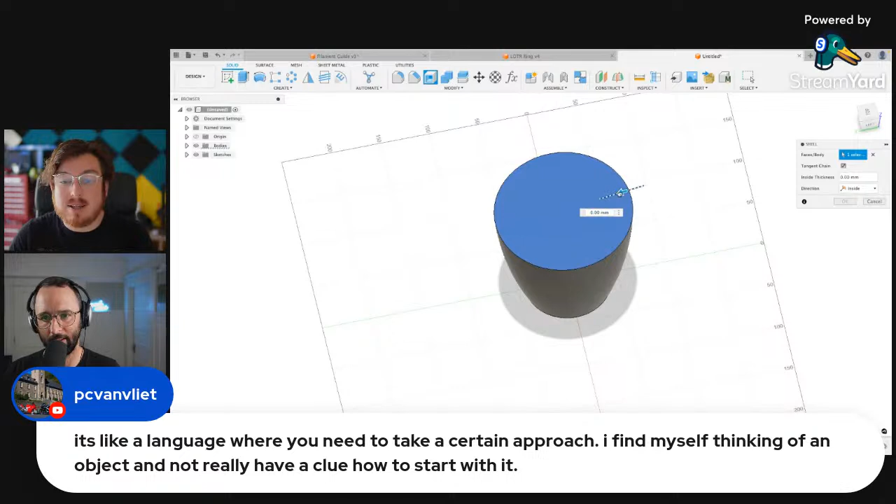That's cut all the way around this shape, so let's go ahead and revolve this about that axis. Turn our body back on, click OK, and that's looking a little bit closer, but obviously this is a container with a hollow section. It's got a wall on there, and this is a solid thing, so I would need to use my shell tool to select that top surface and cut out, let's say 5 millimeters or so. And there you go, you have just recreated something on your desk, and it only took 4 steps.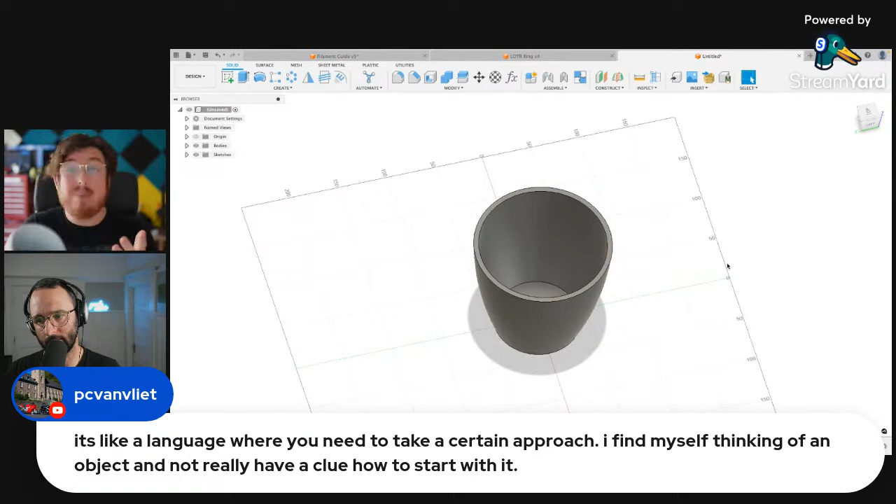So you can then go the extra step and ask, can I make this even more efficient? And you absolutely can. If you start to look at the world in 3D bodies, but also profiles, you may realize this entire thing is actually just a revolved profile. I don't even need to do the whole shelling and then make a cylinder from scratch. I can make this in 2 steps.

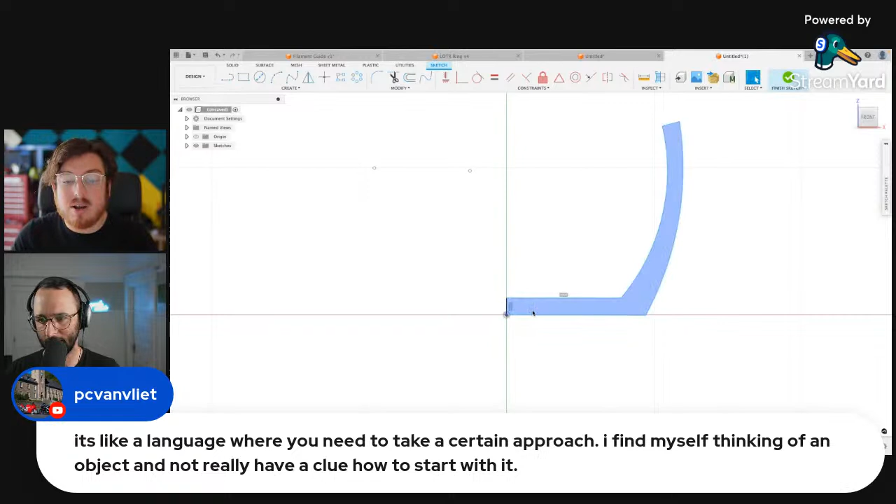I could just go into a sketch like this, make that original arc that we did, make an inner wall, something like that, join the top together, make a base, make an inside edge, join that too. So then we've actually got an enclosed profile right there. Let's make that top one horizontal, make these 2 arcs coincident to each other, and raise up the height just a little bit. That looks good. Now let's revolve it about that same axis.

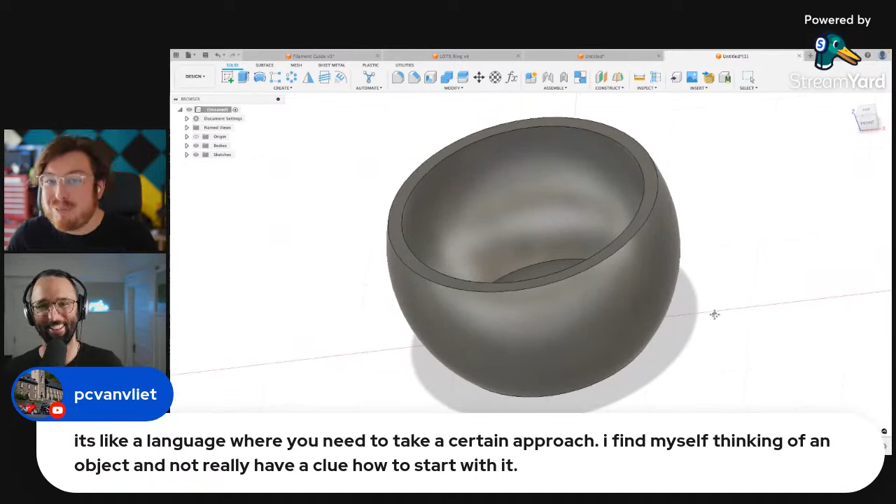It doesn't look exactly like what we made, but all the properties are there, I would just need to add on some dimensions to make it as accurate to this as possible. But again, I've got an arc on the end, it's essentially cylindrical, and it's hollow on the inside. And you've got a perfect thickness between the inside and the outside, which is the exact same thing as this project. It's got the same inside and outside thickness all the way along.

So for this one, it took 4 steps, but on this feature, it only took 2. I'm twice as efficient making this one as I did that one, and I got essentially the exact same outcome from it. So that's definitely something you need to think about when you're doing CAD: how can I reduce the amount of features in my timeline that gives me the exact same project?

So Maple Leaf Makers on top of this says, I have a question about this cup that has been troubling me. How would you make the bottom thicker than the walls with shell?

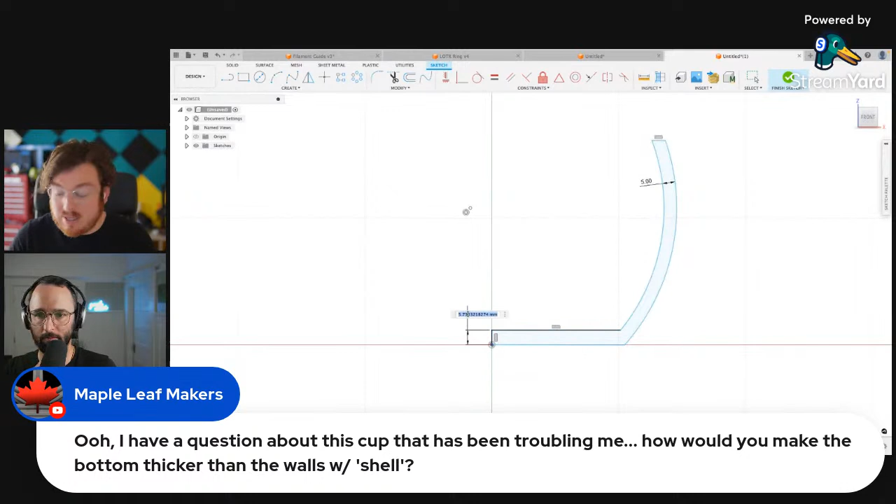This is a scenario where actually going into a sketch like this makes way more sense. I could say that this is, oops, not the radius, I could say that the thickness here is 5 millimeters, and the base thickness is 10 millimeters. There you go, boom. This is now a really thin wall, but if I do a little cross-section analysis, you can see that my base is much thicker than my walls. Done.

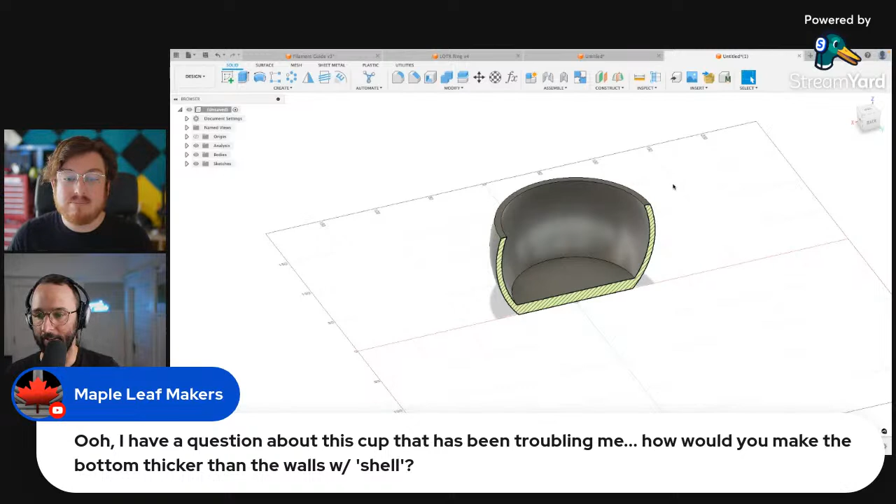So how you go about thinking about how to make these designs, right? You don't always have to fill it. If you need to make a shape that's hollow, you could sketch something out as well, like this is good, extrude the bottom, question mark?

Not really what you want to do there. If I just give these two surfaces 5 and 5, so it's as if I shelled it, and then extrude this bottom surface another 5 millimeters, you can now see I've got this weird angle undercut with a V-shape gap all the way around my project. So that's not exactly the way that I would do it.

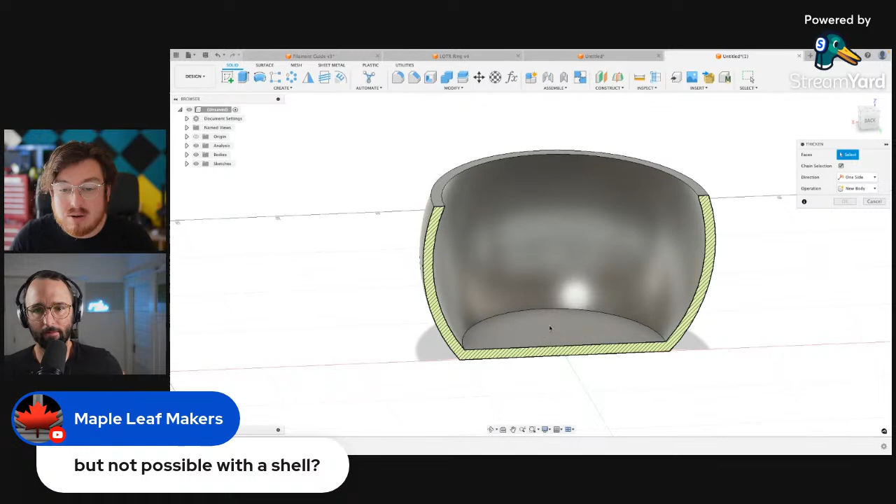There is a tool down here called Thicken, but that's hit or miss whether that will work on your project. It's basically very specific parameters where this will work, and I doubt this will work in this scenario. Yeah, it's not a clickable surface on here, so it's not going to work for you in that scenario.

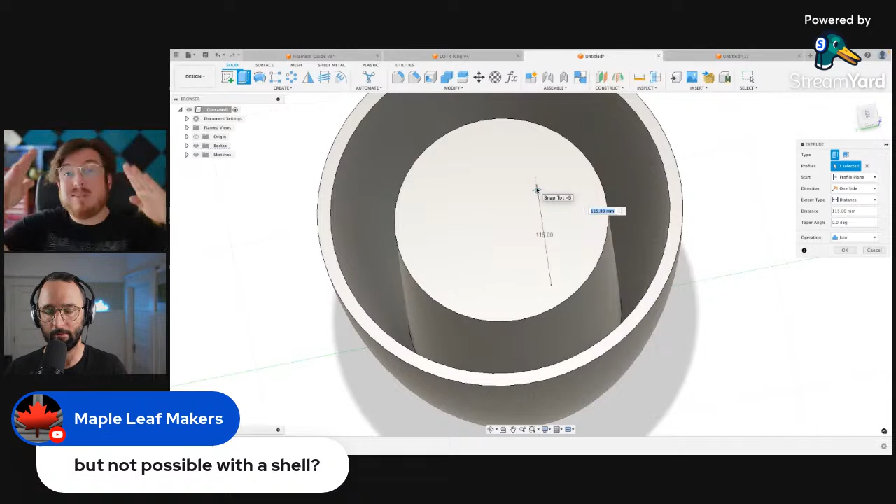So with the follow-up being, but is it not possible with a shell? It is definitely possible with a shell, but you are just taking this circular profile and extruding it upwards. As you can see, the gap forms all around the edges and gets worse because we have an angle outwards. If it was going inwards, it could technically intersect and fill the gap, but in this scenario it's not the way you want to do it.

So a different way is still useful, though. I should avoid shell if I need different thicknesses. Yeah, you should probably do it a different way. Shell is a super handy tool, but it becomes your least best friend very quickly. It becomes the bane of your existence. Frenemy is what it becomes. Yes.

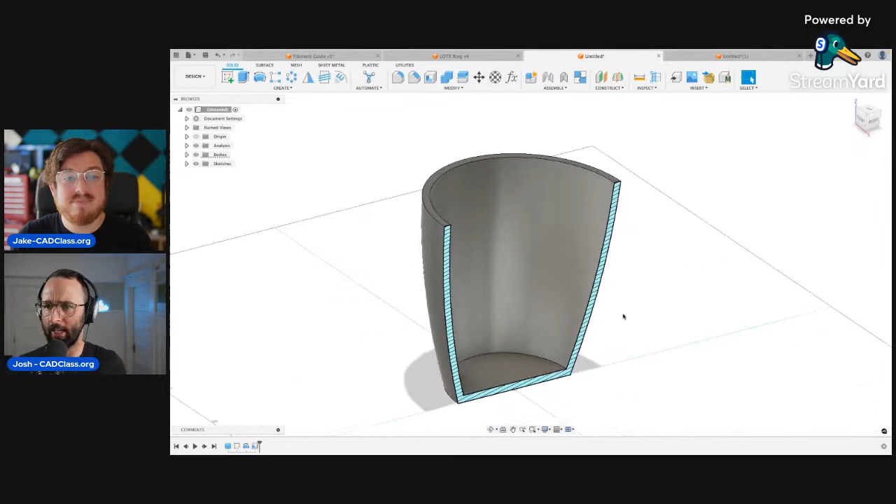Okay, still useful. Bottomless gaps, good. I love the questions coming in. All right, we had another one, which is not so much a question as an ask for future projects. Todd Phillips says, I would like to better understand how to model in tolerances.

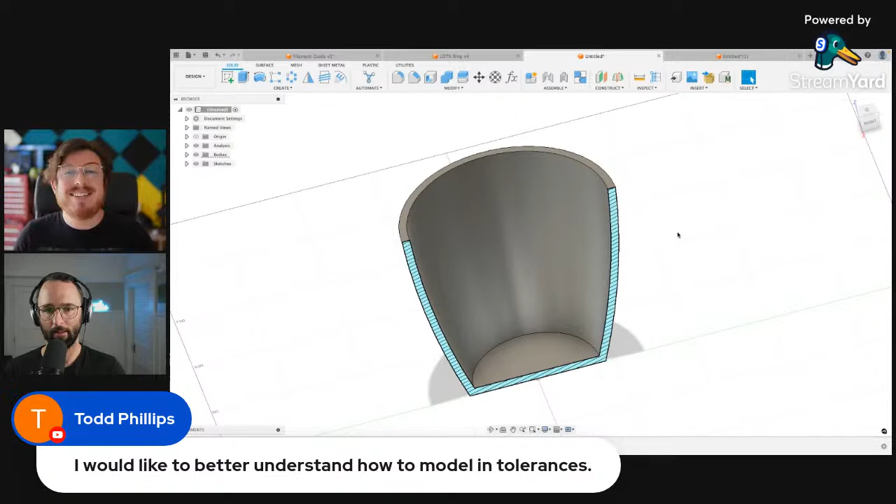Tolerances is a concept we go over a little bit in the engineering drawing section, chapter 4. Tolerances is a really funky topic because it's easy to understand the simple stuff, but it gets very complicated and technical as soon as you creep a little further into it. It's an entire class you can take. If you want to look into the field more, the standard in America is called GD&T, Geometric Dimensioning and Tolerancing. The body that governs exactly how you talk about tolerances is ASME, the American Society of Mechanical Engineers. They've put out a PDF of all their standards, about 200 pages, just about exactly how you tolerance something, called Y14.5, I believe is the most up to date. So that's totally a rabbit hole you can dig into, but fair warning, it gets crazy very quickly.

Definitely look into it if you'd like, tolerancing gets kind of wild. And I'm not sure I completely understand what you mean by how to model in tolerances. Do you understand that question, Jake? How to model with tolerances, kind of. Again, I know that field, and that's a little too advanced for a beginner basic. I would try to avoid that topic until you feel much more comfortable within CAD.

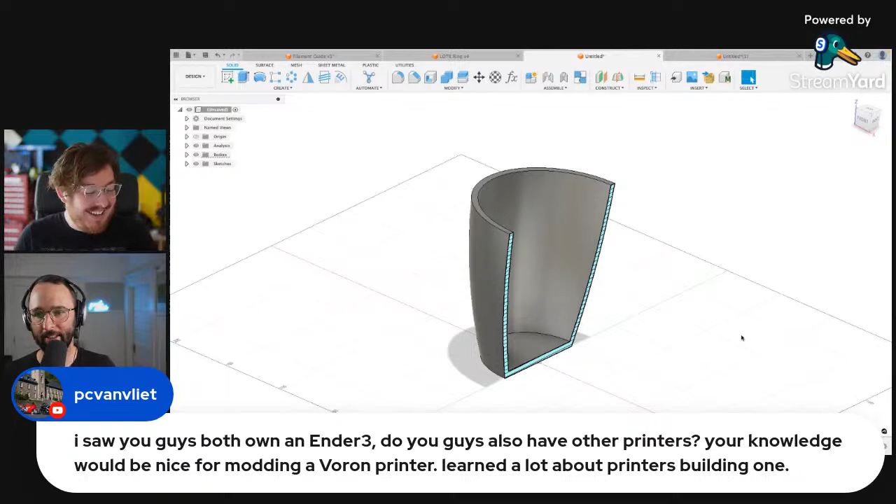pcvanvliet says, I saw you guys both own an Ender 3. Yes, we do, Ender 3 V2 Neo for Jake. I've got a modded original Ender 3 with a silent motherboard and a BL Touch I never installed, glass bed, things like that. But he says your knowledge would be nice for modding a Voron printer. Learned a lot about printers building one. Yeah, I think. Yeah, I definitely hear you there.

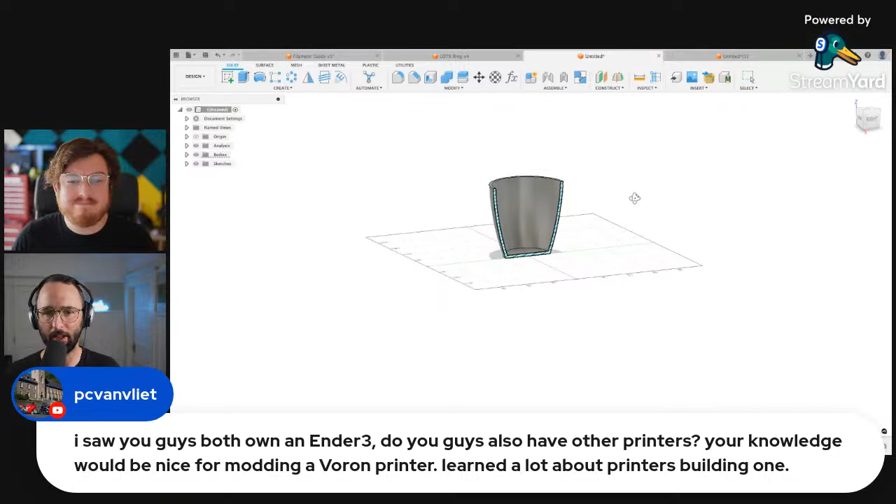I think we're less focused now on 3D printing than we were before. We actually closed down the 3D print farm that we were operating, not really pushing very hard. We've chosen deliberately to focus much more on the CAD side of things for people. So I've heard nice things about Voron. We also saw the Voron that was printing at absolute ridiculous lightning speed. Remember that Voron we saw at Open Sauce? I mean, ridiculously fast, that took fast to the next level. Voron is amazing, I don't see myself spending all that much time on that.

I think where we try to add value is in more video content, thinking about the next book, writing out more things. So by the way, there's the big Bambu Lab announcement, everybody's going bananas over it. Now you really have this competition between Bambu and Prusa, which is heating up, and that's really good for the consumer. So I think what we're trying to do for the consumer side is, hey, who cares what 3D printer you own, it doesn't actually matter. We're trying to teach you how to make a model so that you can use somebody else's printer, so you can model this up and show other people your ideas.

I think where we're going to come at this is, how do we add value? We're selling the shovels, right? Everybody who owns a printer needs to know CAD if they want to make their own custom stuff. So we kind of view it like that. I don't know, what do you think about that, Jake?

I definitely agree. I think a big part of us, I'll say this until my face is blue, is about accessibility. The Ender 3 is super cheap, has the biggest community in the world for 3D printers, is fairly easy to assemble, and pretty consistent. It's not spectacular or amazing, but it gives you the area to tweak and really improve exactly what you're making. And the Voron, I believe, is still not sold as a kit. They kind of give you a list of stuff to buy, and you have to figure it out on your own, and that's super daunting.